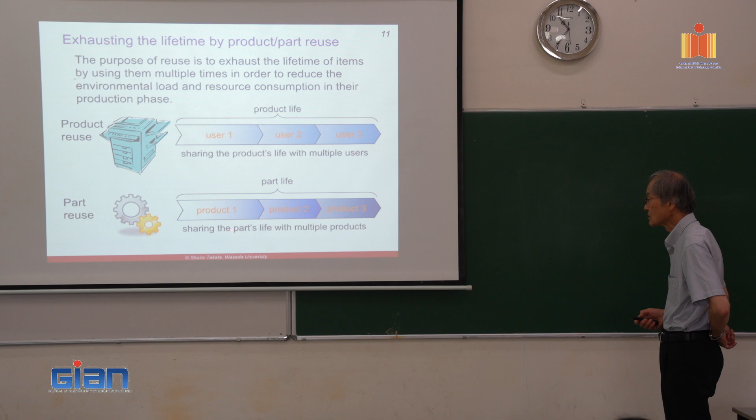On the other hand, part reuse means that part life is shared by product 1, product 2, and product 3 - it is shared with multiple products. So the objective of reuse is to exhaust the lifetime of products or parts through multiple users or multiple products, reducing the number needed to satisfy user requirements.

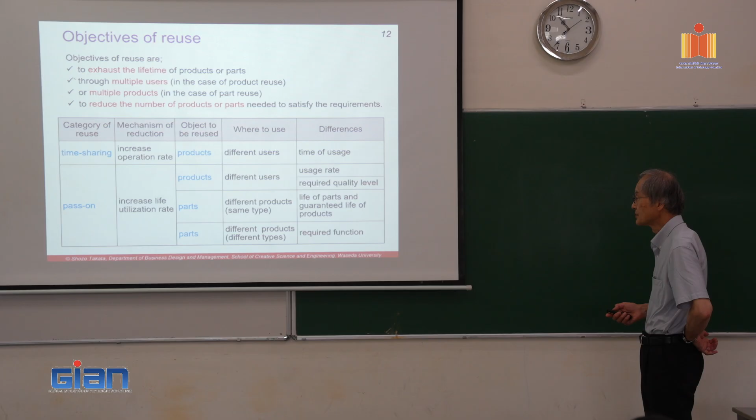There are several ways of reuse. One is time-sharing reuse. If user A uses a car during the week, but user B uses the car only on weekends, then if user A and user B share one car, you don't need two cars - you only need one. This means sharing one product makes the usage rate higher, and you need less product than if not sharing.

Another way of reuse is called pass-on type reuse, which means that products are passed from one user to another. This type of reuse is possible because there is a difference in required functional level.

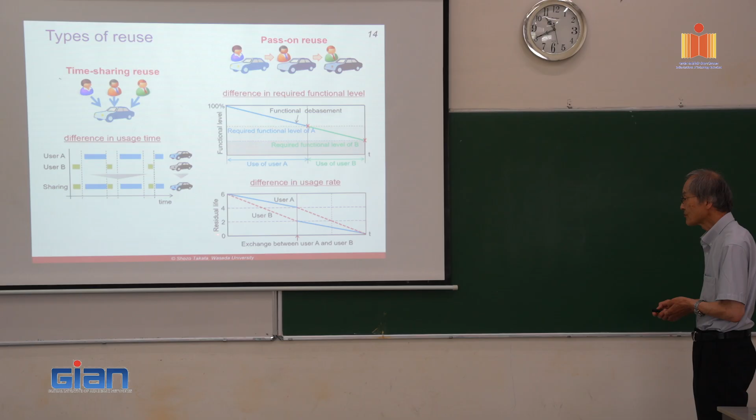If user A and user B change the product at a certain point, then during the usage time, the life of the product can be fully exhausted. Without changing, you might need three products, but if you change at the right point, you only need two products.

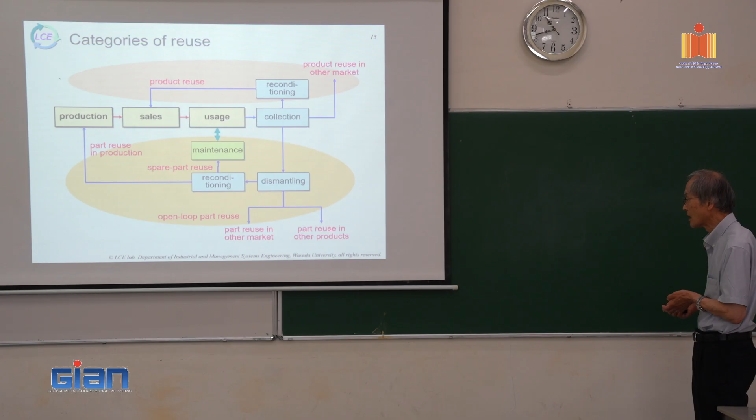As I mentioned, there are many ways of reuse: product reuse, which can be closed loop or open loop, and part reuse. Part reuse can be used in producing a new product, or reused as spare parts - that's called spare parts reuse. There is also open loop part reuse, used in other markets or other products.

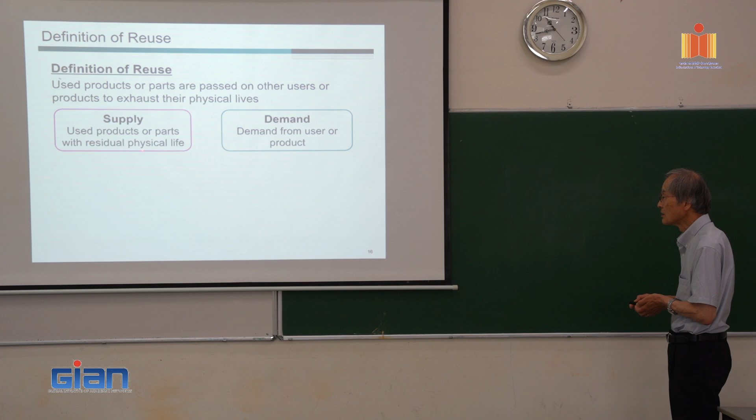What's important is that you need a kind of difference for reuse to be successful. In general, you have supply and demand, and supply and demand should match each other. In the case of reuse, some kind of difference makes reuse possible.

For example, a difference in the level of functional requirements among purposes or among users, a difference in amount of usage among users, or a difference in period of usage among users - this makes time sharing possible. Or a difference in period of usage between products and parts. These differences are quite important for making reuse possible.

So from the point of view of reuse management, we should match supply and demand in terms of timing of collection and level of functional requirement.

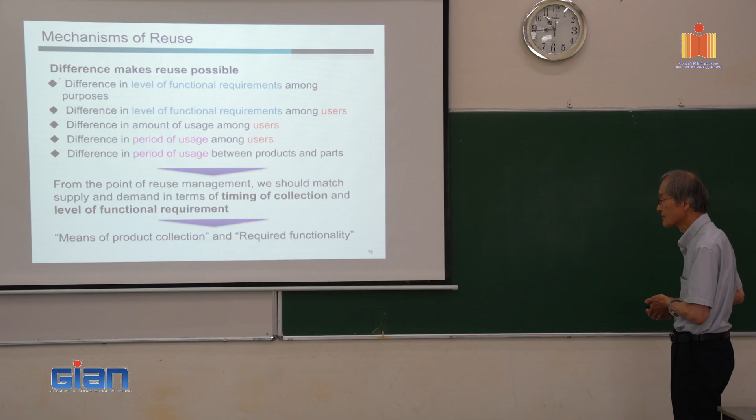So again, if you look at product reuse, you can categorize it in terms of the means of product collection and required functionality.

Means of product collection means who decides the end of life. If the user or customer buys the product, then the customer decides when to discard it, or when the product reaches end of life. But if the product is provided like a leasing or renting, then the end of life can be decided by the operator, so you can plan the time of collection.

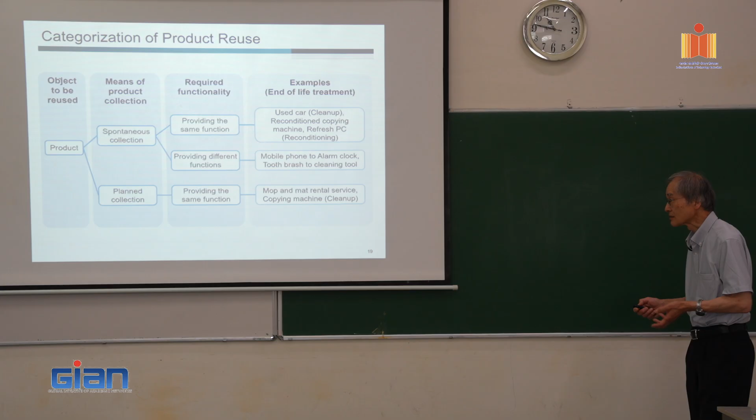With planned collection and providing the same function, this means rental services like mop and mat rental, or copy machines, and so on. Part reuse is also categorized in terms of product collection—spontaneous or planned—and required functionality, providing the same function or a different function, and so on. There are some examples of this combination.

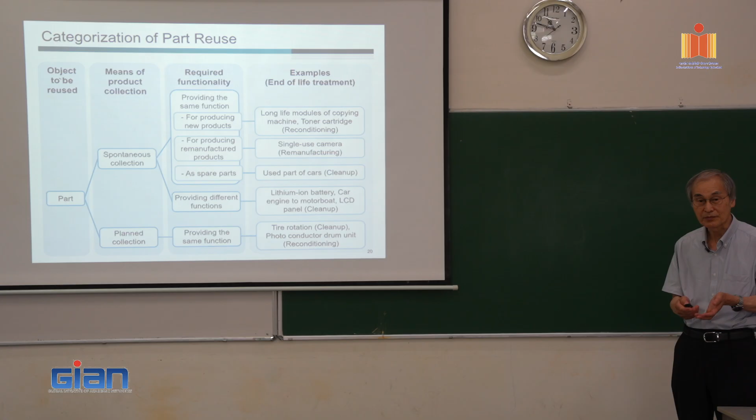So there are many aspects to categorize reuse, many ways or variations in reusing the product or the parts. And also there are many levels of treatment in reuse.

Just clean up—so second-hand cars are sold just by cleaning up. But reconditioned copy machines are once disassembled, partly disassembled, cleaned, and have consumed parts replaced. Or remanufacturing, where it's completely disassembled and made into a reused product at the same level as a new one.

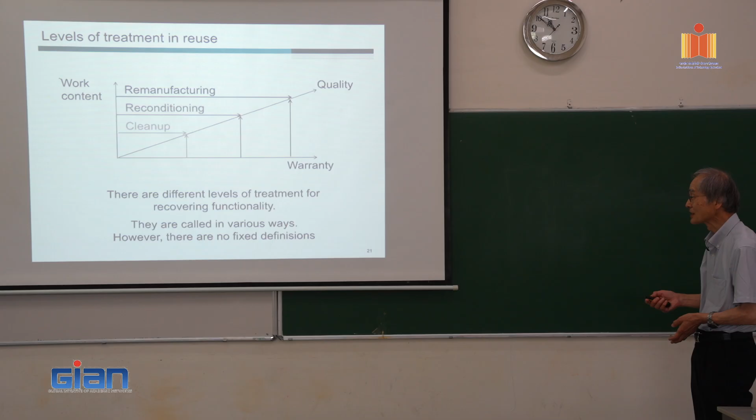As I told you, there are different levels of treatment for recovering functionality, but it depends on the persons. There are certain differences, but no fixed definitions. Someone says remanufacturing should provide at least the same functional level as new, but sometimes better, because the machine could have an initial failure at the beginning of its life due to defects in design or manufacturing. If you correct them and it reaches steady operation, it can be more reliable than the brand new one. So someone claims this, but it's not always true. There are no fixed definitions, but it is true that there are multiple treatment levels in reuse.

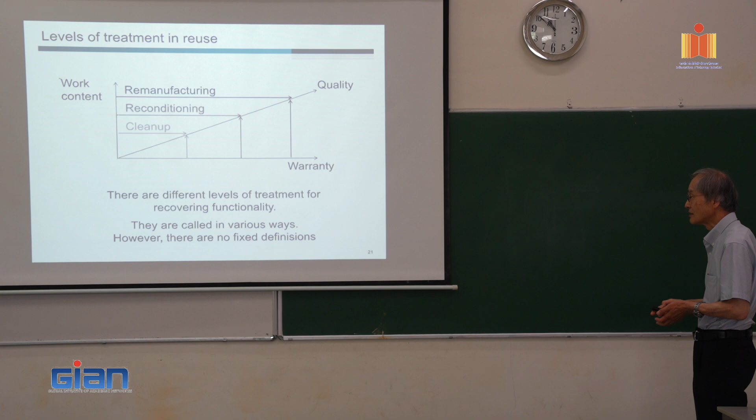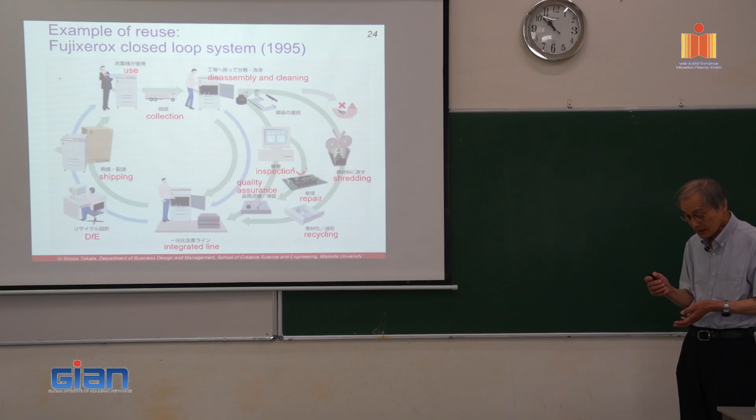Okay, so some examples of reuse. This is a very old example, but an early stage of this kind of circular manufacturing—the case of copy machines by Fuji Xerox, a closed loop system. They extract usable parts from the returned product and use them to produce a new machine. They checked the condition of the parts and have a lot of data on how long each part's life is, so they can assure reliability and quality of the parts used in new production.

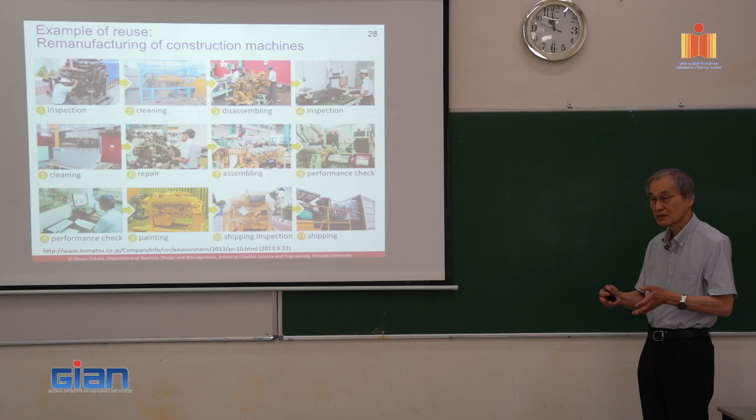If you think about the mining machine, how the machine operates is quite important to get the material from the mine, and therefore the lead time for the repair and supply of the part is quite important. It is much easier to supply the parts from the reused part than the newly produced parts. If you have to produce new product or parts, then you need a certain period of time. But in case of remanufacturing, you can shorten the lead time of providing the parts.

Remanufacturing automobile parts has been long executed in many countries - maybe in India, maybe in the United States, and also in Japan, such as alternators or starters. The alternators or starters are disassembled and the parts are changed, cleaned, and supplied.

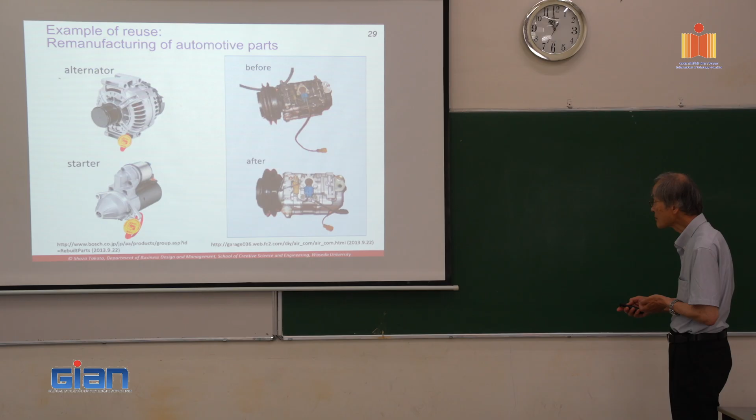This was already shown, but this is an example of tire retreading.

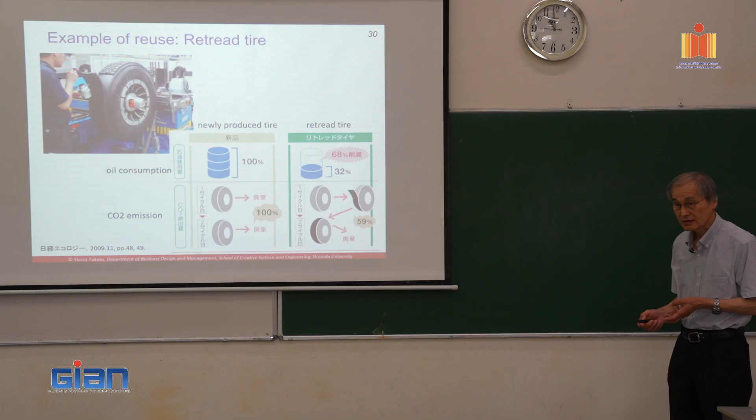This is again the case of copy machines, the case of the Ricoh company, and they call them reconditioned copiers. By using this kind of system, you can reduce the environmental impact by around 80% in the production phase. If you look at the environmental impact of the whole life cycle, the reduction rate is about 30%.

Why this difference? Do you know? The biggest environmental impact is produced by the paper in the case of the copier. The user uses the copy machine to make copies using paper. And if you think about the life cycle impact, this type of impact should be included in the calculation. So the life cycle impact consists of not only the production phase or material extraction phase, but also the usage phase, like cars.

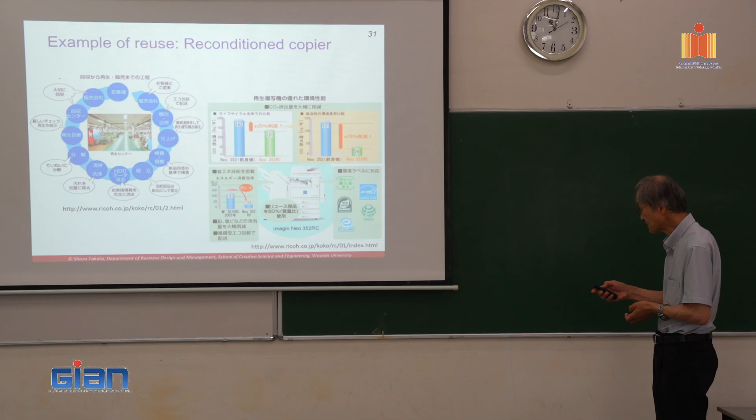This is again the Ricoh case. The data is a bit old, but we interviewed the Ricoh company and got this data. So let's say 1,000 copy machines are sold to the users.

Then 80% of the end-of-life copiers can be collected by the recall. Some are just discarded by the user, or exported, or left as they were - maybe 20% disappear from the control of the manufacturer. But anyhow, 800 units can be collected.

Then they are brought to the local collection center and checked for the models of the copy machines. Not every model can be reconditioned - only a certain time span or certain model can be reconditioned. So by this check, the 800 units is reduced to 160 units.

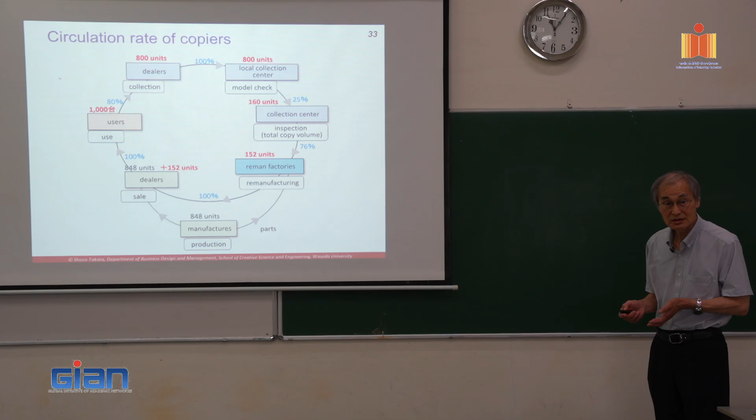Therefore, we need methods to improve the effectiveness of reuse - how we can improve this 15% ratio, make this figure more. There may be different kinds of ways, but I want to show 4 examples of the method.

First is reusing parts for multiple generations. If you look at one model, the sales period is limited. In the case of the copy machine, roughly 2 years - this is the period one model is sold.

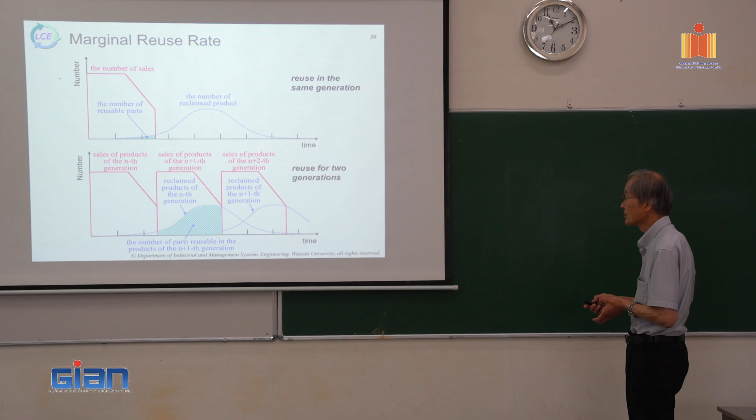So commonizing the parts across multiple generations of products is quite effective for enabling part reuse. This is one way of increasing the possibility of reuse.

The second approach is determining the optimal sales period. As I already said, the sales period is limited. This is a schematic diagram showing the sales amount of model A, model B, model C, where the model changes every two years. Model A will be returned, collected, reconditioned, and sold as a reconditioned machine. But there's a certain period during which you need to recondition a certain model.

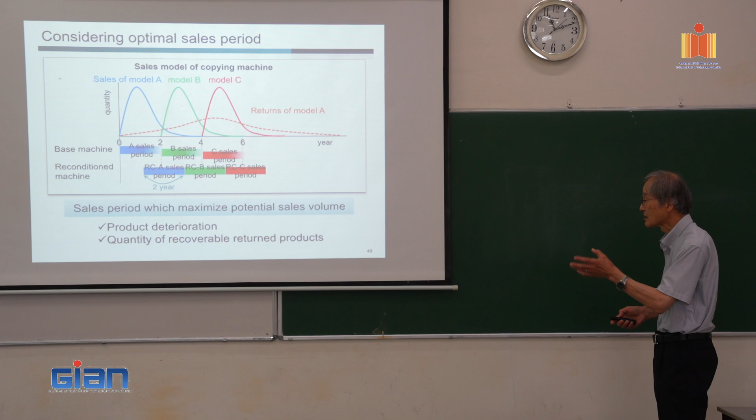So the question becomes: when should you change the model of the reconditioning machines? That's the question in this case.

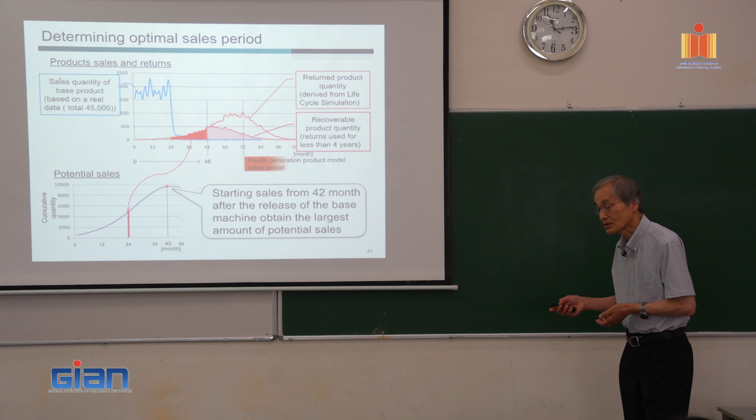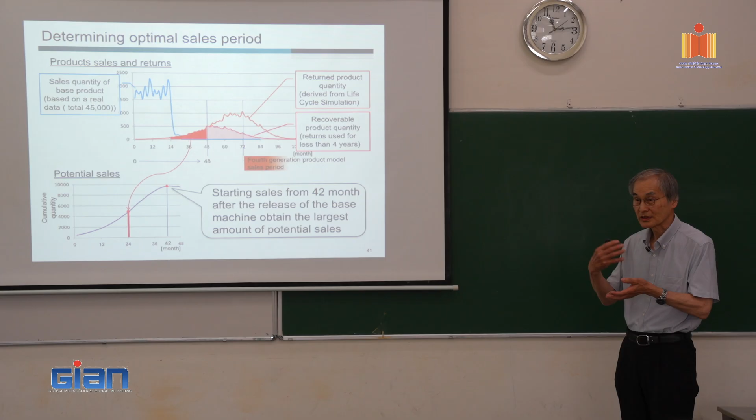So the question is which period you should recondition a certain model - the reconditioning machine of a certain model. You need to think about the change in the model or the sales strategy, and the sales of the reconditioned machine should align with this sales strategy.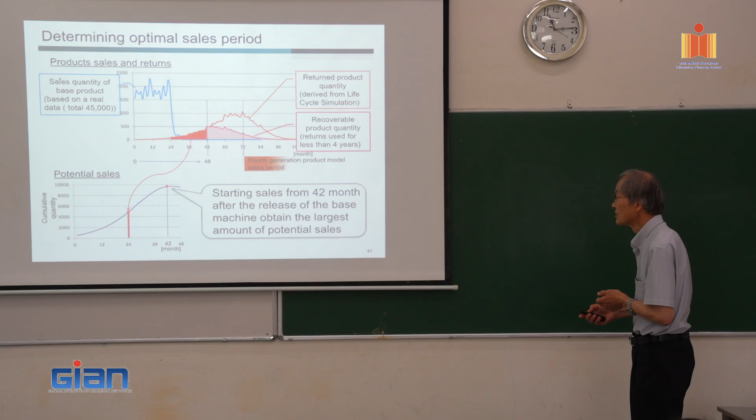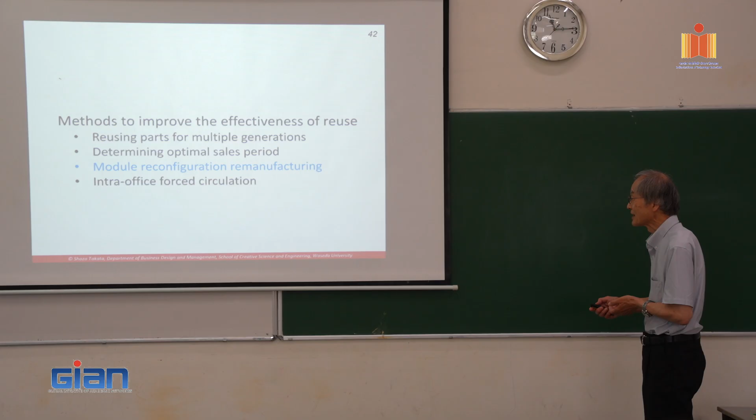These are the actual cases, but the other two are research-based methods. I'd like to explain about module reconfiguration, remanufacturing, and intra-office forced circulation.

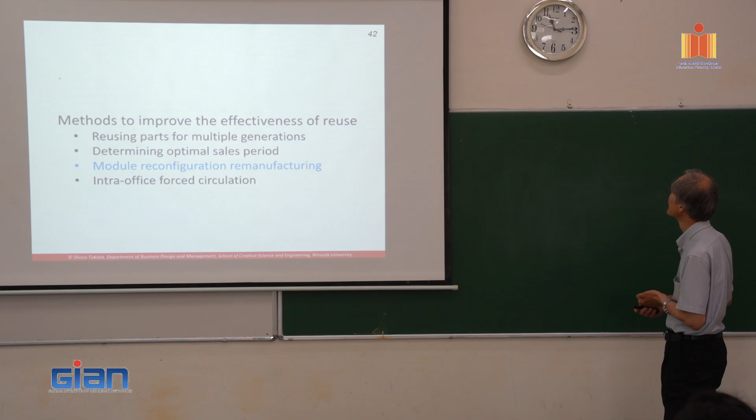Again, every two years or every several years, you have a change in the generation of the product, and also the return product changes accordingly. If you look at a certain point in time, the model which is new or newly produced is only one in each period of time.

But if you look at the return model, for example here you have return models of the first generation, second generation, third generation. That means the return products include multiple generation products - not just one model that doesn't return.

In general, each generation model, or the second generation model, is superior to the first generation model. That is the manufacturer's strategy to improve a certain level of functionality. In this case, let's say performance 1 means quality of the copy, and performance 2 means speed of the copy.

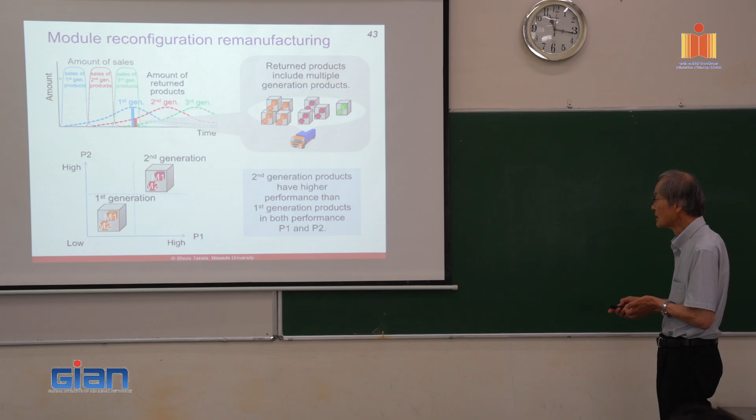There are many users. User A may have a higher requirement in terms of performance 1, but for performance 2, she does not have any strong requirement - she can be satisfied with lower speed but wants very good copy quality. But user B has another requirement: he copies a lot of papers, so he wants a high-speed machine, but he doesn't care about the quality of the copy.

So if you have a first generation and second generation product, you only reuse the second generation product to satisfy user A or user B. The first generation product doesn't satisfy either user A or user B.

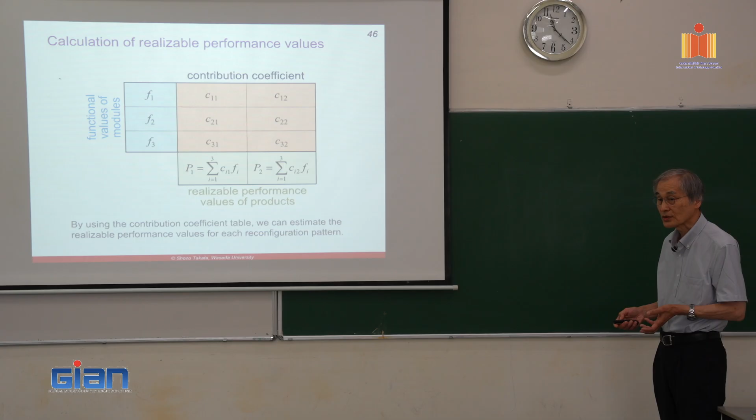And then, as I told you, we should calculate the realizable performance value and the required performance value, and match between them.

So if the realizable performance level of the remanufactured product is higher than the required performance level in all levels, then the product can be provided to the user. So this is the criteria.

And we applied this type of concept to the copy machines again. In this case, performance indices are image quality, power consumption, usability, the user interface, paper jam frequency, and waiting time. Waiting time means that if the power is off, then you put on the power, you need to wait a bit of time until the copy machine is working.

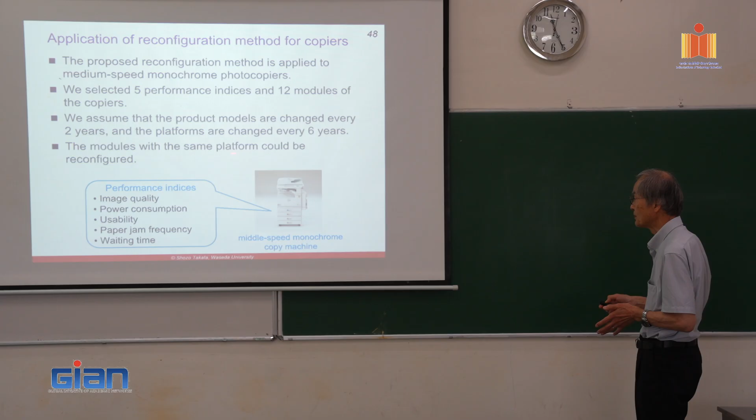So in this way, the efficiency of designing the new machine is accelerated by using the platform design. So the modules with the same platform could be reconfigured. If the platform changes, then you cannot reconfigure the modules, so the interface will change.

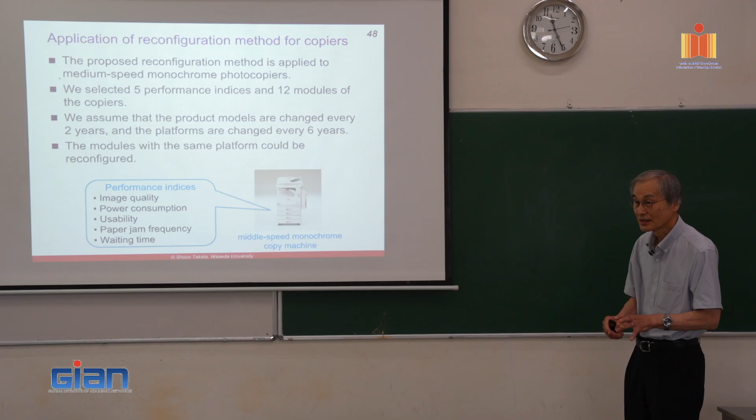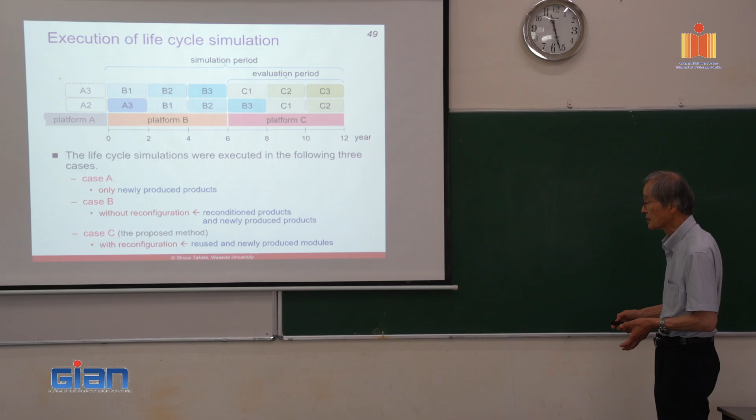We assume 3 cases. Case A is only newly produced products. Case B is reuse but without reconfiguration—meaning the company sells reconditioned products and newly produced products at the same time. Case C is the case where reconfiguration management is introduced.

I just want to skip the details of the calculation, but this shows the result. The horizontal axis is the time, and for case A, the vertical axis shows the cost multiplied by environmental load. So we need to think about the environmental impact as well as the cost.

Of course, in each model, you can introduce a way of reducing the environmental impact. So even just a newly produced product could reduce the environmental impact. But in case B and case C, you can reduce the environmental impact while satisfying the user's needs.

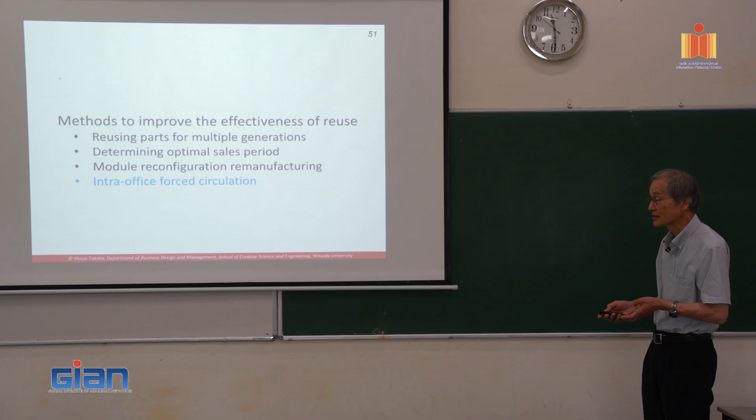Okay, so another example is also calculation by research, but the idea is—just a moment—intra-office circulation. Again, this is also the case of the copy machines.

Let's consider the copiers used in an office with multiple sections, such as a university or company office. There are many sections, and each section may have copy machines. But each section has different usage characteristics. Some sections use a copy machine very frequently, and some sections don't make so many copies.

So again, we assume that there are certain levels of differences in the use of the machines. We assume that the copier manufacturer makes a blanket contract to provide the copiers to all sections for a certain period of time. So the company has a contract to provide the machine to every section during that period.

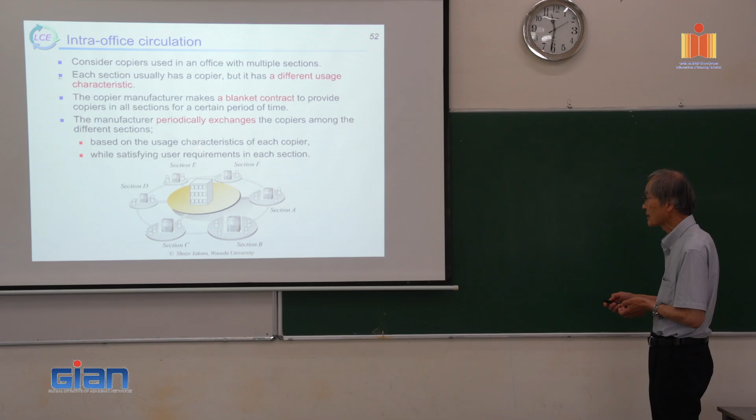So this type of contract is possible: the manufacturer periodically exchanges the copiers among the different sections based on the usage characteristics of each copier, while satisfying user requirements in each section. As I told you, some sections make a lot of copies and other sections don't make so many, and each section has different requirements in terms of quality and so on.

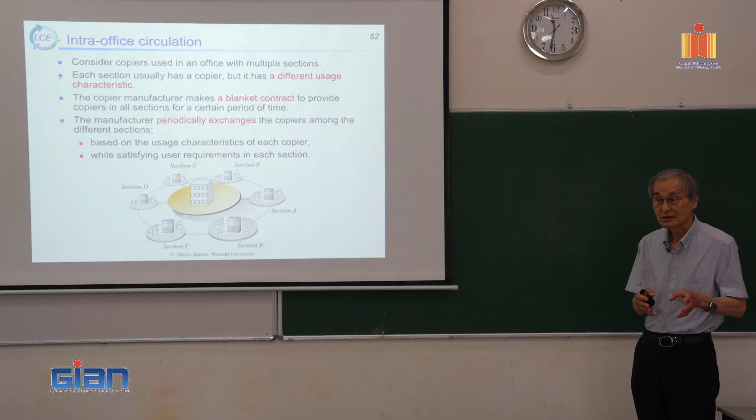So the question is how we can circulate or exchange the copy machines to exhaust the lifetime of each machine and reduce the amount of machines needed to satisfy the user's needs over a certain period of time. So we need some models in this case.

So the user has a certain copier functional requirement expressed by UR, and Q is the required value of quality characteristics. Quality characteristics of copiers again are image quality, electricity cost, noise level, operability, and frequency of occurrence of jams—almost the same items which we assumed in the last example.

And there are certain levels of weight in each quality characteristic. Some users put more weight on noise levels, and some users put more weight on operability and so on.

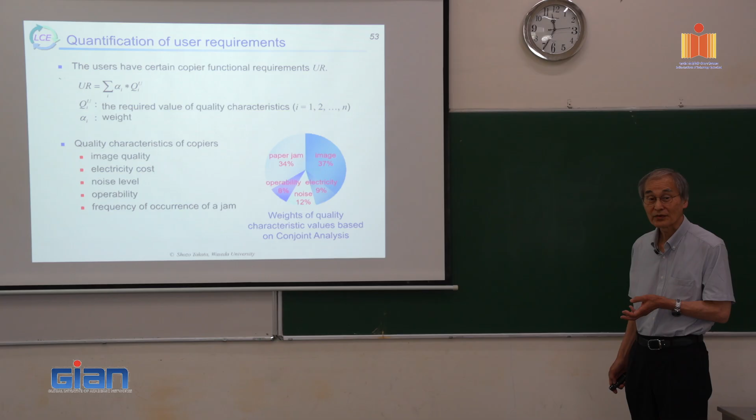For the functionality of the copiers, we assume physical deterioration and an obsolescence function. Obsolescence function means that every 2 years or so, a new machine appears, and the functional level of the old machine decreases because of the emergence of the new machine. So we calculate the functionality by multiplying the physical deterioration and obsolescence function.

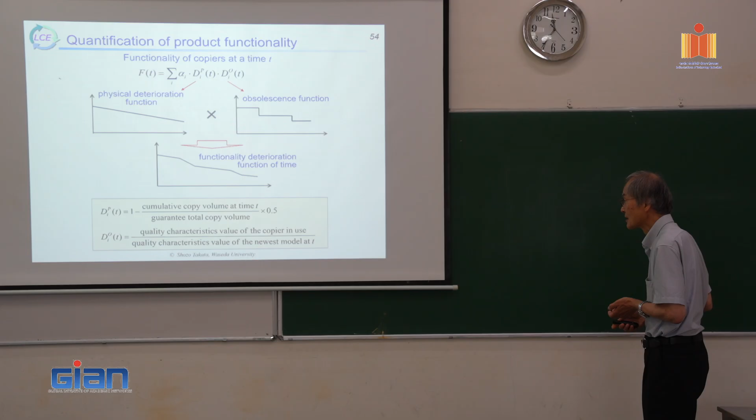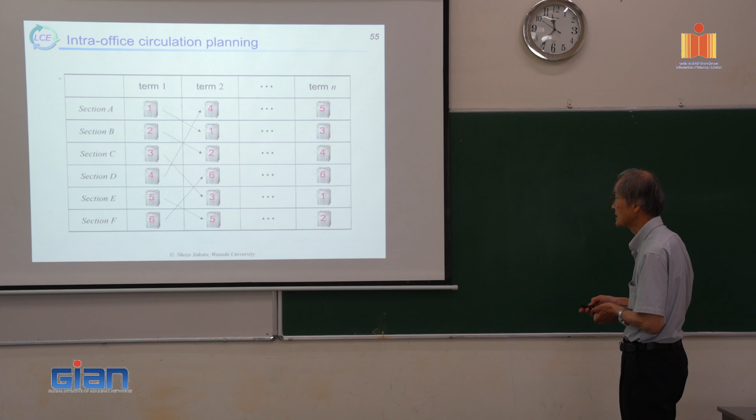So now, how we should rotate, or how we should exchange the machines. We calculate, or optimize this kind of exchange schedule by using the genetic algorithm, which I told you about yesterday.

And the objective function is to maximize the functionality utilization rate, because this is the functional level and this is time, and the functional level deteriorates at a certain rate. But if you stop using the machine, you can't use this area. The total area is this one. So how much is the used area? That is the functionality utilization rate.

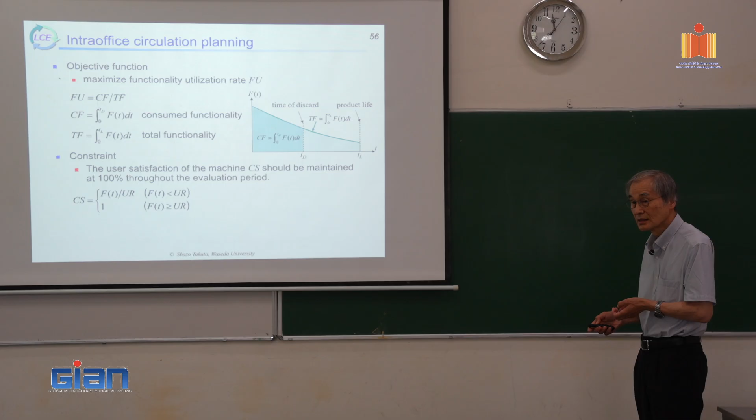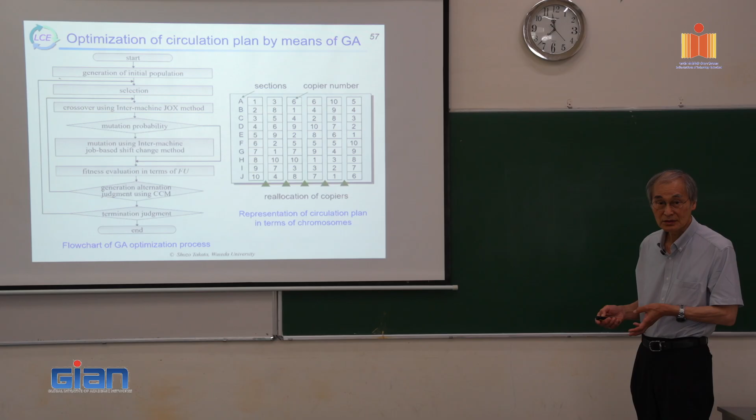And there is a constraint that the customer satisfaction should be more than 1. So I will skip the detail of the calculation, but anyhow, we applied the genetic algorithm to get the optimum schedule of the reallocation of the machines.

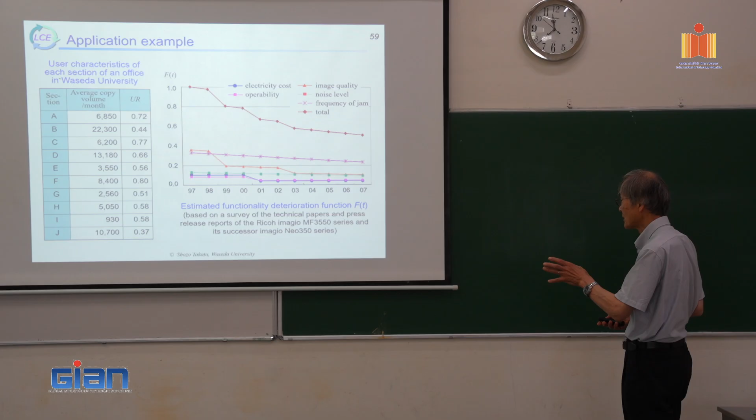These are the user's characteristics, and these are the changes in electricity cost, operability, and so on. So we collected the data from the company, and also estimated from questionnaire surveys and so on. And we evaluated 3 scenarios.

Intra-office circulation scenario, that is the scenario we are proposing. The second one is a lease scenario, leaving product return to user discretion. So if the level of functionality becomes less than the user requirement, then the user returns the machine. But the machines are not reallocated.

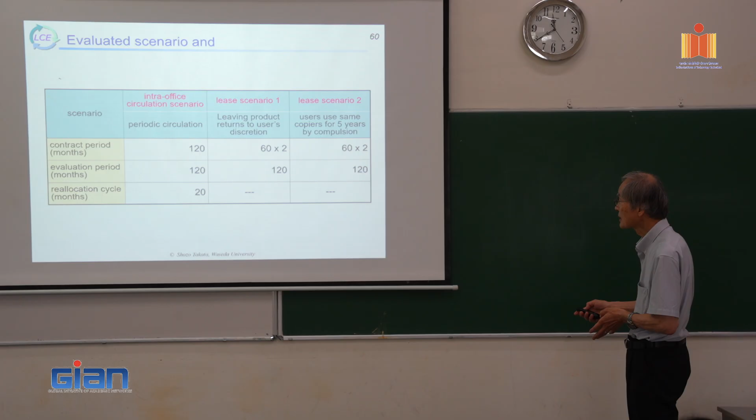Lease scenario 2 means the user uses the same copy machine for 5 years by compulsion. So you need to use that machine for 5 years, regardless of the level of functionality. 5 years is a common period of lease contracts in Japan. And this is the calculation, and this is some examples of the result.

This shows the average functional usage level, and this line shows the average customer satisfaction. So this is the circulation scenario, lease scenario 1, lease scenario 2. If you look at lease scenario 2, the average functional utilization rate is not so different from the circulation scenario. But if you look at the average customer satisfaction, in the circulation scenario, user satisfaction should be maintained at 100%.

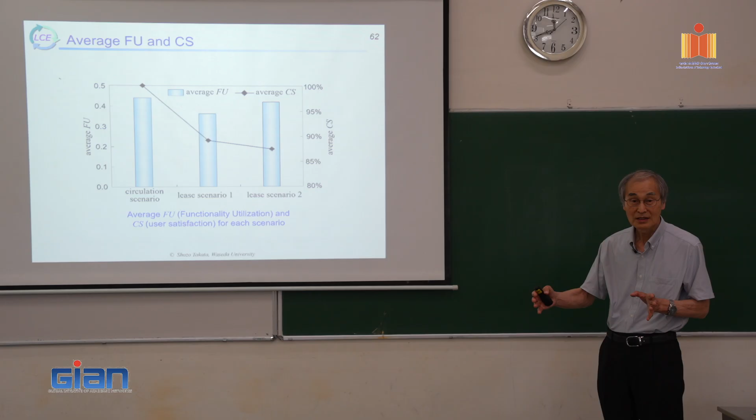But in this scenario, you need to use it for 5 years compulsorily. So you cannot change it, although you are not satisfied with the fully satisfied performance of the machine. Therefore, the percentage of average customer satisfaction becomes lower than in the circulation scenario.

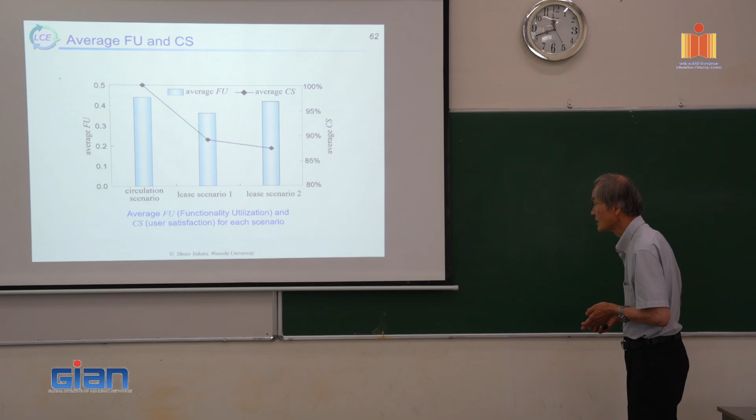And if you look at the LCA, the circulation scenario has the lowest value. The LCA is calculated by CO2 emission, and intraoffice circulation reduces the CO2 emission by approximately 20% and 10% as compared to lease scenario 1 and 2.

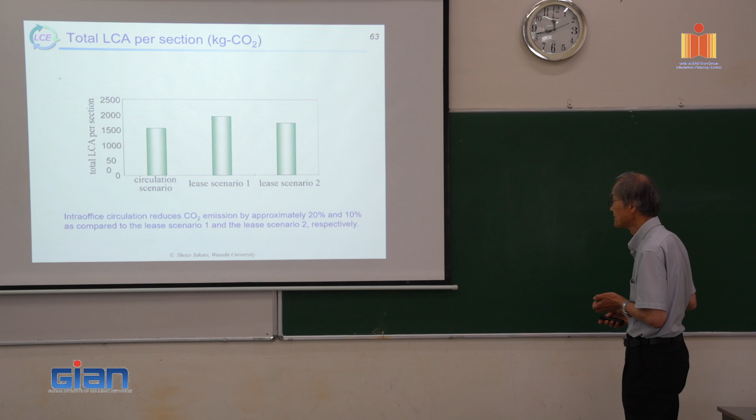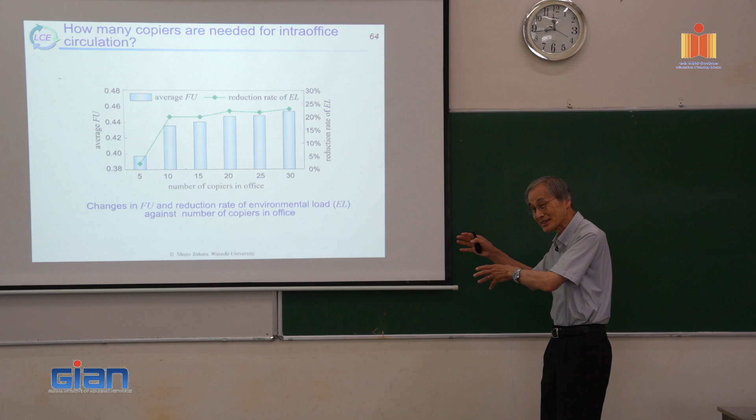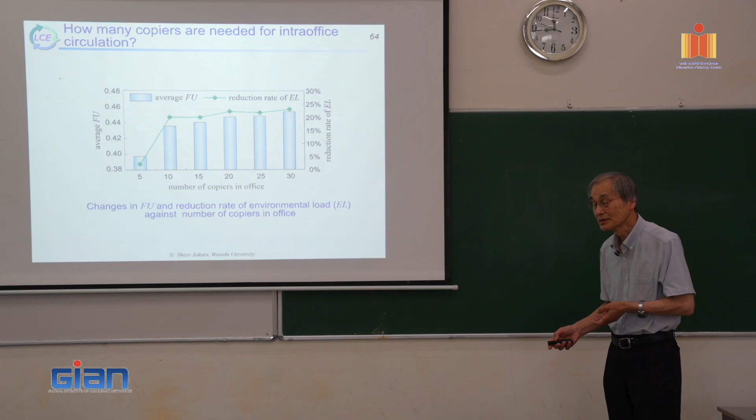This calculation shows that with more than 10 machines, this type of strategy can work. But this is just for this case. I'm not saying that in general more than 10 is necessary. But in this case, with only 10 machines, you can apply this type of strategy.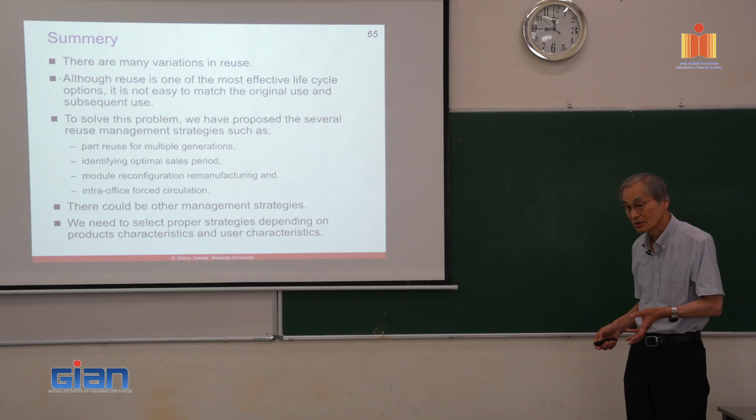Summary. There are many variations in reuse. Although reuse is one of the most effective life cycle options, it is not easy to match the original use and the subsequent use. To solve this problem, we have proposed several reuse management strategies, such as part reuse for multiple generations, identifying optimal sales period, module reconfiguration, remanufacturing, and intra-office forced circulation. There could be other management strategies, of course. We need to select proper strategies depending on product characteristics and user characteristics. Maybe you should also consider market characteristics. Okay, thank you very much for your attention.